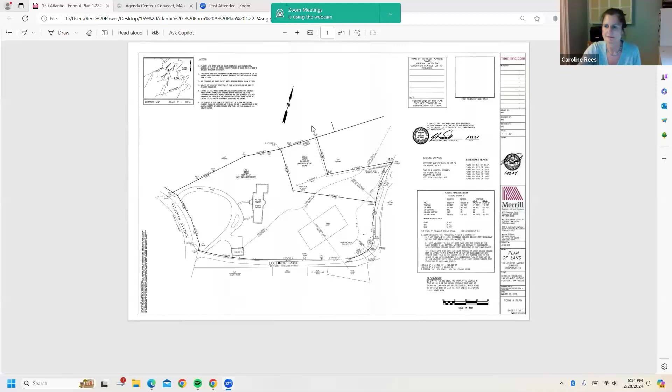Yeah, we can see, Brendan, you're breaking up more than Caroline is, so maybe Caroline should present this. It's not changed from what we saw the last time, correct? Okay, well I guess maybe, no it is not. Okay, oh good, he's there. Am I stable now, or is it still choppy? Yeah, that's all right, go ahead.

Okay, so the plan hasn't changed from before. I guess Mr. Higginson did have a conversation with you, Tom, I believe, stating that section of the zoning does still apply because it doesn't affect the Form A as far as the zoning change from last November. It's the zoning, just so everybody knows, the day after I got Caroline's opinion, which I think everybody has seen, which Caroline, I'll summarize it, correct me if I'm wrong, but...

A&Rs do not fall within the ambit of an amendment to the bylaw, as other permits would, like a special permit or a subdivision, and things of that nature. So the old rule with note 4, which has now been eliminated in the new bylaw, will still apply to this. Charlie happened to be visiting Merrill upstairs on the day after I got the letter, and I informed him of the opinion. He came down to say hello, and so I informed him of the opinion that day. So to me now, this is fairly straightforward. I don't know, Caroline, if there's anything you want to add.

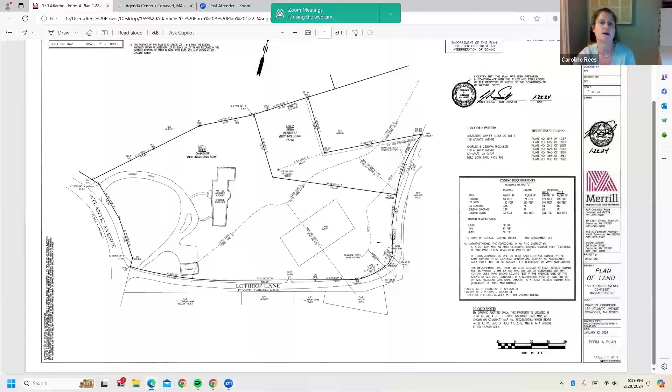That's not my understanding. I believe the intent is the provision in attachment 2.4, number 4, when you have 2 lots owned by one property owner. Was the intent for it to be a buildable lot? That's the whole purpose of this. Yes, it falls under that, as Caroline said, and we put a notation in the bottom of the zoning box with the exact verbiage of that section.

Note 4B specifically: where a lot is greater than 120,000 square feet, you can carve off 20,000 square foot lots as long as the average of those lots is greater than 60. The existing lot has 125,000 square feet, so we're carving off a 25,000 square foot lot and a 100,000 square foot lot, so the average is greater than 60. All right.

What you could do, Mr. Chair, if it gives the board some comfort—I'm just checking if it was already included on the plan. I can't see it on this view. Caroline, if you could zoom in the bottom of that zoning table, the verbiage is right there.

I wasn't suggesting that. I was suggesting what the board could do is include in their signature block that the endorsement is not to be construed as any sort of compliance with zoning, and just leave it at that. It'll ultimately be up to the building commissioner to determine at the time of building.

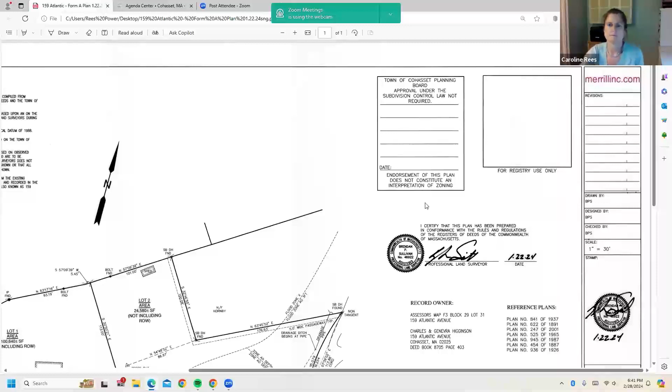This could be the last under 60,000 square foot lot developed in Cohasset in RC.

All right, anybody else on the board have any questions? Well, typically we make some kind of assessment about access and frontage. What do we have? Does the lot have frontage? It does.

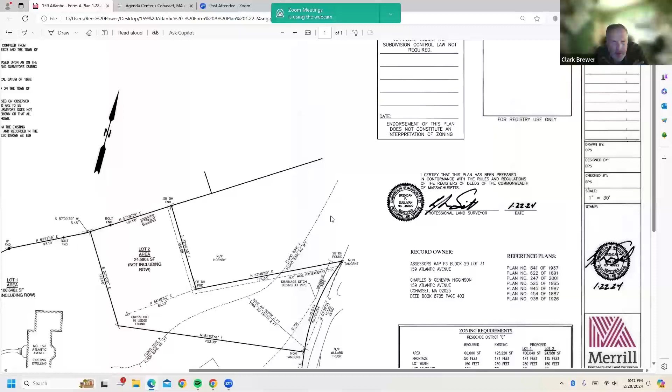It meets the frontage, lot width, and area requirements. I can read it to you—I can see it. I'm just asking the question because that's what we're supposed to do. And I can see that there's frontage on Lothrop Lane, a private way. Correct.

Lothrop isn't very wide, but I believe there are houses further into Lothrop beyond this point. Doesn't it make a big loop? Yeah, it does narrow. It loops at the end technically—I thought it dead ends. Mathematically, it does connect to Hobart, but there are a few houses beyond it, at least three, maybe four, beyond this lot, so you have access and frontage from a private way in existence prior to zoning.

Yes. And I think the only other thing the planning board would consider, and maybe counsel can confirm this, is whether it's of adequate width and construction—adequate width, suitable construction grades, et cetera, for vehicles to pass over.

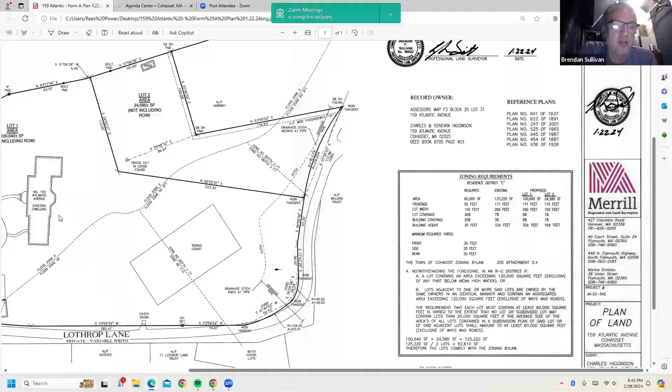This particular diagram doesn't have any topographic features. What is the topography there? Are there issues that are discussable because there is some reason to do so, or is it simply a flat and indifferent piece of roadway? It's a fairly flat lot.

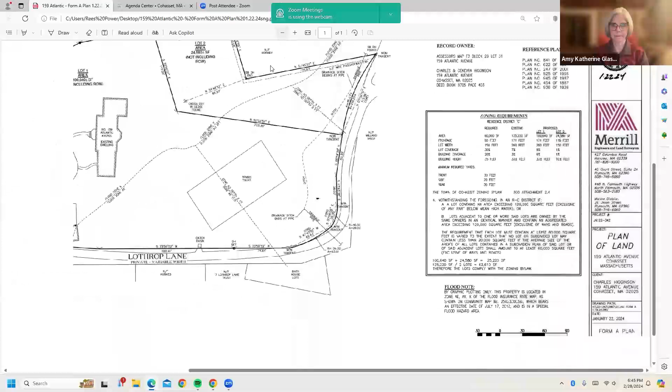We are showing the flood zones. It is accessible. There already is a gravel drive off of Lothrop Lane that runs approximately along the 5-foot wide passageway in the northern portion of the lot.

But the access isn't illusory. It's not a big piece of ledge between the access and the usable part of the lot, and it's not a big wetland. It's not illusory access. Correct, there is some wetlands there, but we can get access into there.

Doesn't seem that there's necessary additional discussion then. No, it's pretty much access, frontage. Whether it meets zoning or not is not really our thing. The issues of it being in the floodplain and what can get built there would be a different inquiry for a different time.

All right, so let's move along. Do I have a motion to endorse? And if there's any conditions, state what conditions you would add. Motion to endorse as presented. Second. Okay, any further discussion?

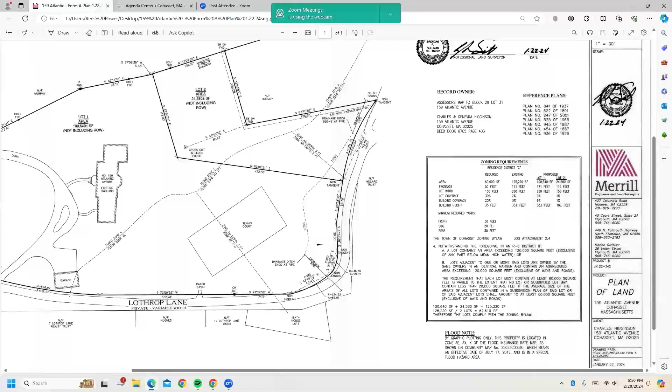I actually have an easement through the property. Do you see that easement there? That's my easement. And I actually am trying to figure out, they're trying to carve out that L shape there to build on. You all say that there is no water on that property or very little. I actually have video footage of a lake in that property.

Right, Ms. Murphy, I'm going to cut you off there just because the approval-not-required process is a form of dividing two lots under Massachusetts law. It's very, very limited. It only says, can you divide a lot? Can you create two lots that have adequate frontage and adequate access to it? Those are the only two inquiries. And again, we talked earlier about the endorsement — we're not saying anything else in this process about its compliance with zoning and its buildability.

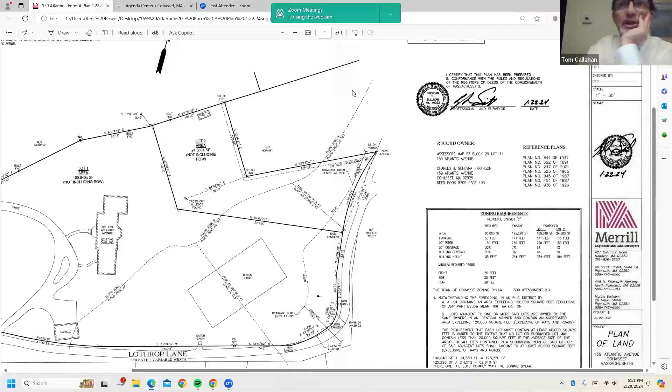Okay, understood. The owners have expressed that they intend to try to build, but we've heard the word floodplain. Now you're saying actual water. Yes, this will still get subdivided subject to any easement rights that exist. Okay, and they're going to have to go through the process of getting a building permit. If they're in a floodplain, they're probably going to get a conservation and a zoning permit.

Okay, there's going to be a lot of things that go on, and that's where you would bring up these concerns, with all due respect. I don't mean to cut you off. No, sir, I really appreciate your saying that.

I didn't quite understand that. Like I said, I had tuned in for another meeting and then this is what I saw. And given that I'm a direct abutter and never heard anything, I was quite surprised. Yeah, but the ANR process is this quirky little thing in Massachusetts law, and it's not considered a public hearing, so it doesn't require actual notice. The one for Hobart Lane that we're going to deal with is a public hearing, and we will read a public notice that was sent out.

That's a different process than what this is. I thought that our neighborhood required a 60,000 square foot minimum to subdivide. Well, there is a quirk in our bylaw for Residence C that allows them to do this, as long as the average of the resulting lots is 60,000 square feet, and the average of these two lots is still over 60,000 square feet.

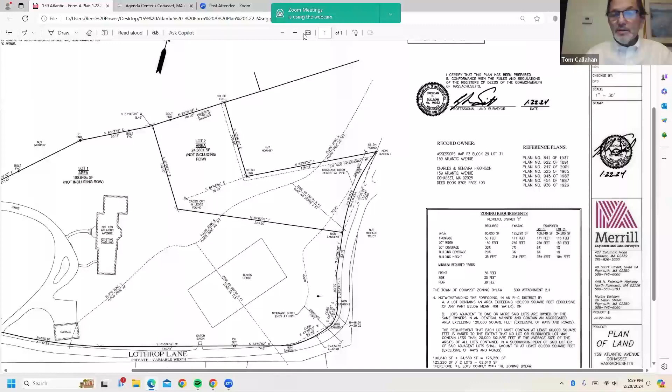All right, next we have 31 South Main Street. I believe this is a continuation of a special permit and site plan review under the village bylaw. Well, whoever's here for that.

Good evening, this is Gregory Morse. Hey Greg, how are you? Are you going to be taking the lead here? Yes. All right, why don't you bring us up to speed on where we were from last time?

Sure. This is a continued hearing at 31 South Main Street. I'm representing the property owner, EMF Rice Realty Trust. Erica Rice is on the call with us tonight. Also with us is the architectural designer, Paul Ford, for the property. This is an existing building that we were proposing to construct an addition off the back of it.

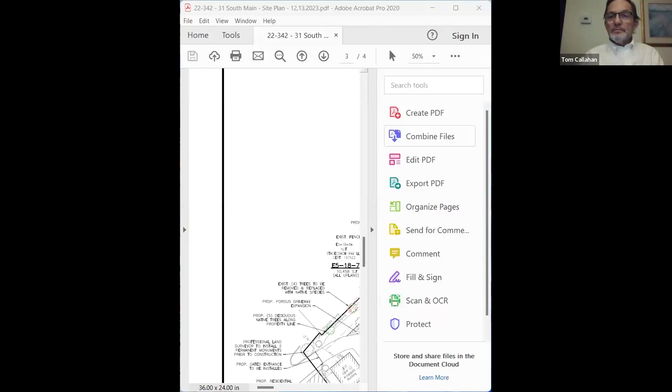You see the plan right there? Yeah. Yes. So this black bold line is the perimeter of the property. The property is in our village business district in the downtown area. The existing building is right here, number 27. This has one existing residential unit in it, and it has storefront along the front of it on South Main Street.

What we've shaded here in gray is the proposed addition. That is an addition of one residential unit. And included within that addition is a 2-space parking garage. Those 2 spaces would service that unit in the back of the building. The front of the building, there's that one unit on the inside already serviced by 2 parking spaces adjacent to the building. We weren't changing those parking spaces.

Out back, we were adding a very small area of new driveway just to access from the garage to the existing pavement on the site.

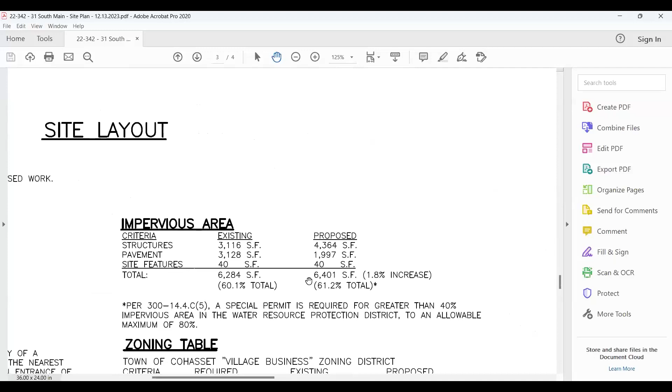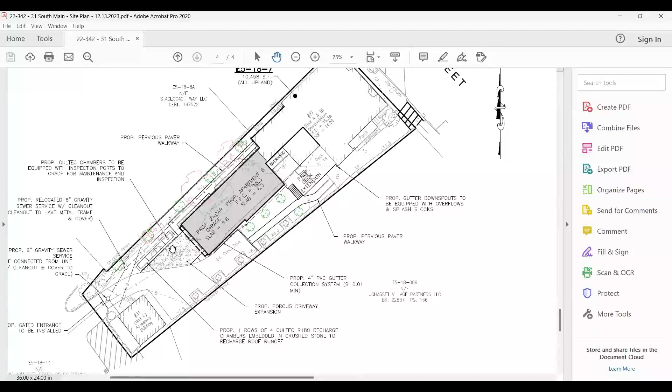We proposed to mitigate that increase in runoff by adding dry wells to the back of the building—4 dry wells connected to the roof gutter system to promote infiltration of that additional surface runoff. We also proposed a porous driveway, which is asphalt that allows water to run through it, with crushed stone underneath to promote infiltration.

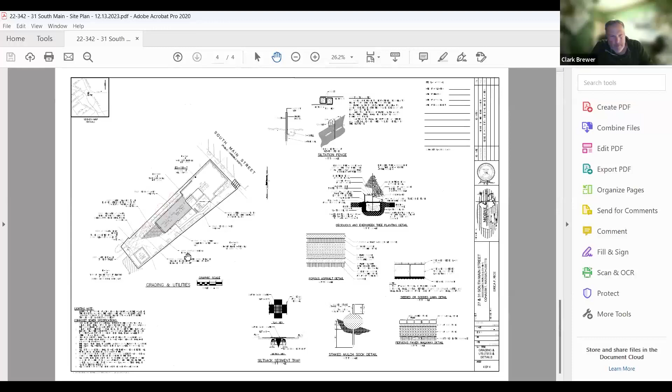All right, and where's the square footage of the unit? So I can have Paul put up the architectural plans. Paul, are you on the line? Yes, I just got it. Yes, so we got the unit size to exactly 1,500 square feet. So we are within the bylaws now.

Requirements. Sorry, I was coughing. What was the number? 1,500 on the dot. I hate when things come right to the dot, because some intrepid building inspector in the future might say, oh my God, it's 1,500 square feet. Make it—we'll put up probably some kind of a shaft somewhere that'll reduce that when we get to it. And this residential gross floor area definition changed, but you...

You're protected by that, since you applied for this special permit. Yeah, I'd add our floor area ratio on this site is well under the requirement as well. You're allowed up to a 1.3 floor area ratio. Our proposal is coming in at 0.52, so it's less than half of the maximum allowed floor area on the site.

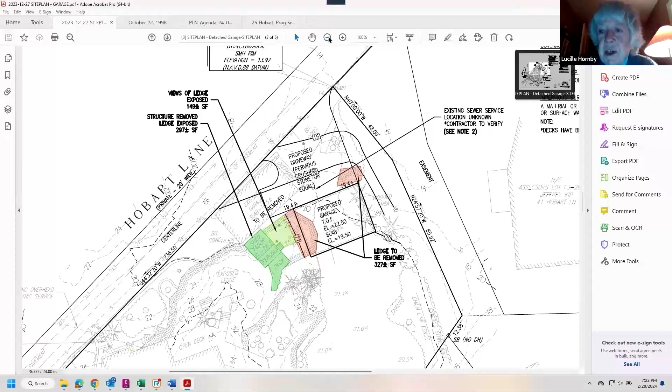Tom, if the abutter is reluctant to speak— she's there, okay. Yeah, I could speak. My property is to the east, I think you would say. It's 36 Hobart Lane, we're an abutter.

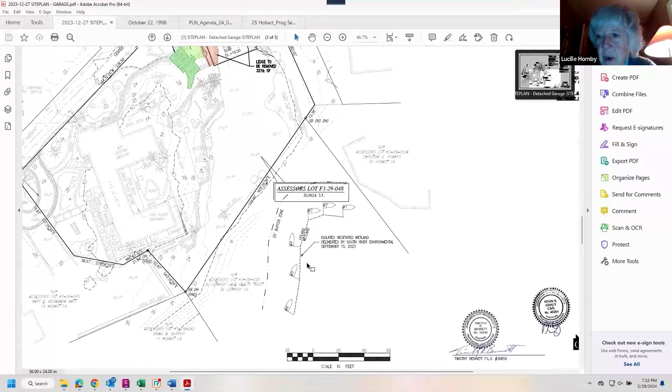And the property under discussion is way higher than my property. We have had a lot of problems with water going from different properties on Hobart Lane down onto my property and my neighbor's properties. I'm concerned the new garage is going to be built, as far as I can see, on what's now lawn, and I don't know what's under the lawn and how much water is absorbed by that lawn. Is there any provision that could be made that when the old garage is removed, there could be some water—I don't know what you'd call it—retention area? The water flows down Hobart Lane and then into my property, and it also goes directly from this property into my property. It seems like there will be less absorbent space after this happens, and I wondered if there could be any provision for using the space where the old garage was for water retention.

What is the plan for that area? There is going to be a pervious driveway where there's currently a paved driveway, but that will be one small cell. Obviously the presence of ledge leads to natural runoff that just is. But what is the plan for where the existing garage is? This area will all be landscaped. That's what we're proposing to do with the existing garage.

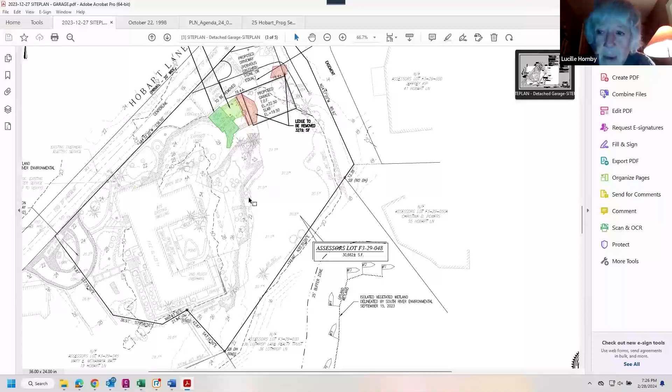Well, for the landscaping where the existing garage is, we could make it a rain garden, Paul, and that does retain water more. We could drop a little shallow point and do a rain garden and route a roof leader over there. Those are actually quite beautiful because they will have flowering plants. It looks completely natural, but it does hold water, and we can direct water in that location, as far away as possible from your property and still on this property.

Well, the problem with my property is that the water goes down Hobart Lane off this. I get water from this property two ways. One is when it goes down Hobart Lane and makes the right turn, then follows Hobart Lane and comes onto my property. So at least any water that's coming down Hobart Lane before where the current garage footprint is, some of that will be captured in a rain garden.

Well, that would be good. But we also have the issue that part of this lawn is now covered with garage. Could there be compensating something there? You are putting essentially now a building as a dam across that little neck of lawn. But the lawn would absorb water, right? Oh, yeah, it'll absorb water, but the question is the roof runoff.

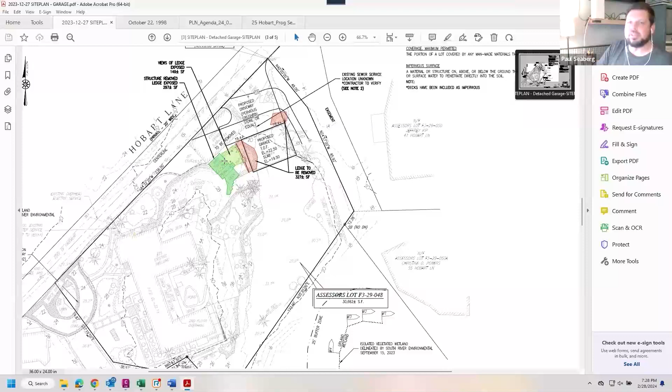Do you have any issues with that, Paul? Would that be feasible? No, that's perfectly fine. But I'd just like to also reiterate that by reducing the impervious coverage on the site, we are actually reducing the runoff that's going to be flowing off the site in post-development conditions from pre-existing conditions. From an engineering standpoint, we may be engaging in overkill, but it's not a problem.

Yeah, that's perfectly fine. Let me ask, are you getting a stormwater permit here? It's not required for this, just as Pat Brennan mentioned in his peer review. Okay, yeah, that's right, he did. But we're gonna kind of take up some of those issues, I guess, expand ourselves a little bit.

And also, where we're removing the existing driveway, that area now being pervious will absorb water, right basically off of Hobart Lane. And it's a similar area as the proposed garage in the grass area, which will be converted to grass area. A dry well on the other side of the garage wouldn't hurt. Sure, yeah.

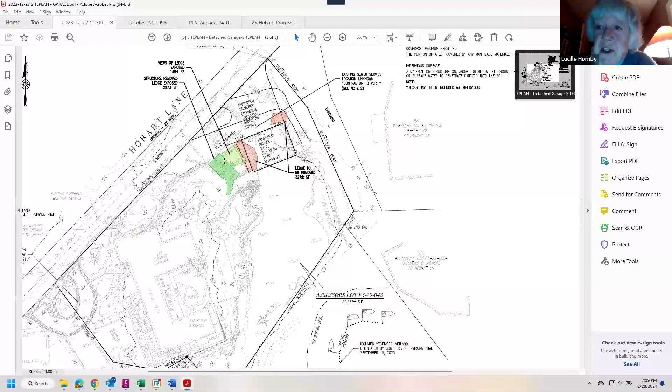Anything else, Ms. Hornby? Not really, because Jeff reassured me that there's not going to be major blasting. I was concerned that if there was major blasting, it would affect my house. The applicant said no blasting, just chipping. Yeah, he said no blasting, we can make that a condition, they represented they can do this with hammer jacks, so we can condition that that's how it gets done. Well, thank you very much for hearing me.

Okay, thank you. Anyone else in the public wish to be heard? Okay. All right, so I'm taking notes here that...

We're looking at removal of ledge and replication of ledge or uncovering of ledge as proposed but modified by Pat Brennan's comment number 1. We're gonna have a pervious driveway, we're gonna have dark sky lighting on the garage, we're gonna have a rain garden at the site of the old garage. The roof runoff on the new garage would be directed both to the rain garden and to a dry well on the other side, and there'd be no blasting, just chipping to remove what ledge has to be removed.

Anything else that anybody is concerned about or would see the need for a condition?

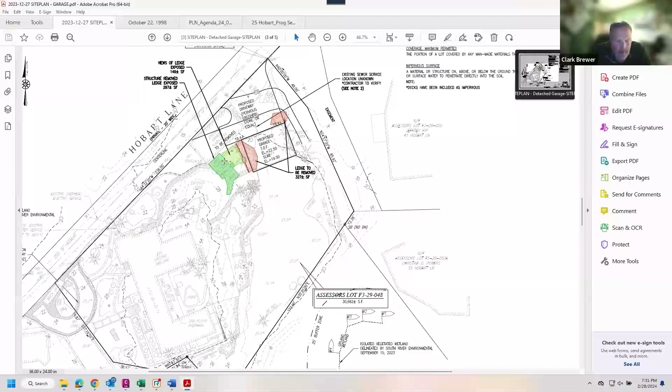I'll make a motion that references what you just outlined: to grant the special permit, making the finding that this is not substantially more detrimental to the neighborhood, with the conditions I've outlined.

All in favor? Any second to that motion? Second. The motion also includes closing the public hearing. Seconded by Kevin, thank you. Any further discussion?

Hearing none, roll call vote, all in favor? Clark Brewer, aye. Tom Callahan, aye. Amy Glassmar, aye. Kevin Heine, aye. Deirdre Hobson, aye.

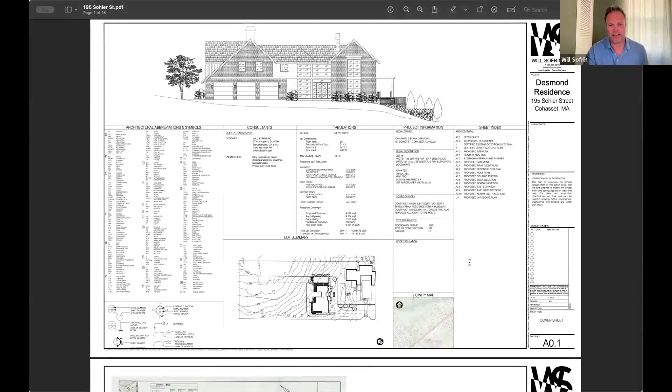I've got right here a cover sheet. So John and Sarah Desmond bought their property at 195 Sohier Street in 2017 with one son, and now they've got three sons, and they're outgrowing their home. Sarah's parents would like to move in with them, so the concept came up to divide the lot into two lots, Lot A and Lot B. The goal is to build a new residence on Lot B for John and Sarah to move into, so that Sarah's parents can move into the current residence on Lot A.

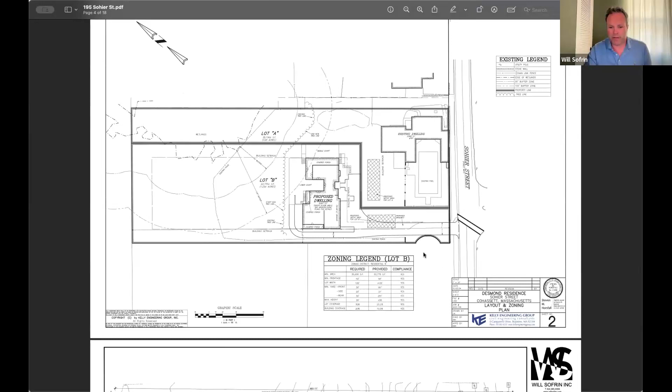I'm going to go right to, got a site survey here from Kelly Engineering. I think the board members will remember that we approved the ANR for this maybe a year ago. And then what we have right here is just certification that this project does comply with all required zoning requirements for the application. Could you zoom in on that for a moment? Yeah, absolutely.

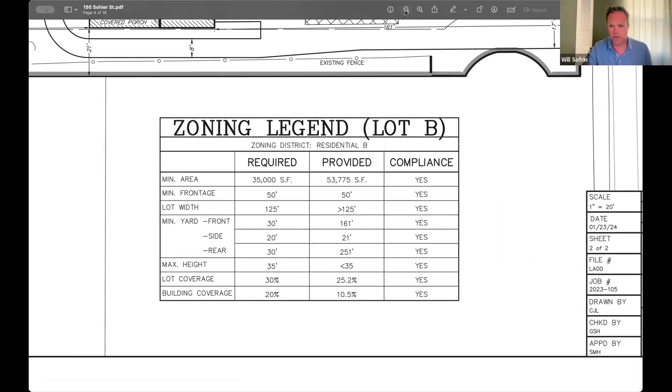Is everyone seeing this? Yeah, okay, all right. I'd like to see your height calculation and how you did it too. I don't know if the height, we have the, I'll show you on the elevation where we have the average grade plane and how we base the height.

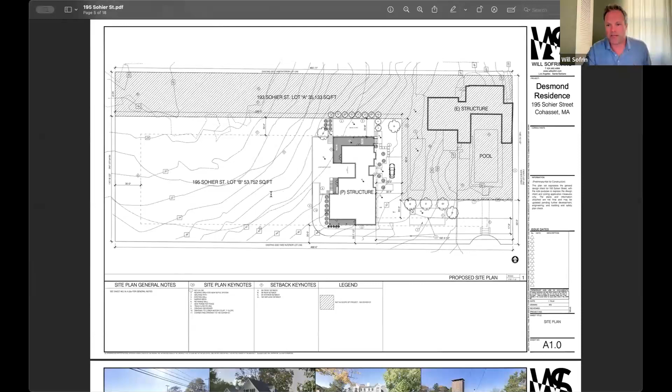What I've got here is a site plan showing the intention. The current house where they live, I guess, was the former town swimming pool and the town pool house. So the idea with this project is to keep the two properties in sync and make this pool area the central outdoor space for the kids and the grandparents. It also creates an opportunity for us to preserve and not disturb any of the beautiful wetland back here, the natural topography, the existing natural landscape.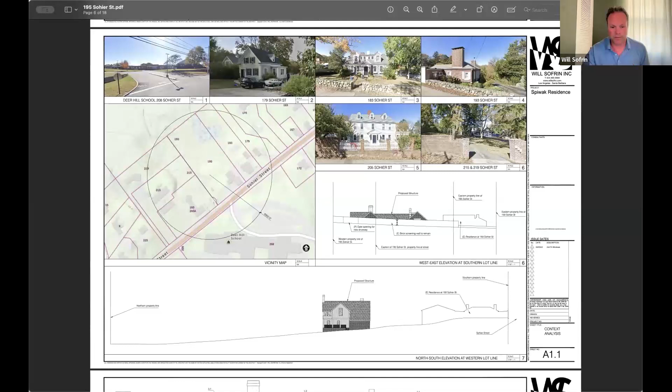This is a profile cross-section of the lot showing the proposed structure in relation to the existing residence that the Desmonds are occupying. The existing structure that they're occupying is a brick structure, and they love that.

So the idea was to design a timeless home that was not contemporary, but something that will age well in the town of Cohasset. I've got here a couple images of some of their traditional inspiration that they really like. They love the brick that exists on the current dwelling, so having white brick was a primary, important material for the Desmonds to incorporate. Also, these steep pitched roofs, something very traditional in New England, was a love of Sarah Desmond, so we've worked to incorporate that into the structure.

We're just proposing asphalt shingles for this sloped roof. We've got a metal lap material for the flat roof eaves right here. And for the foundation, we'd like to do a stone clad look to add that bit of a traditional element that you might have seen 100 years ago with the foundation.

Unfortunately, we discovered during the design process that the water table is so high that it forced us to elevate the structure much higher than we actually wanted it to be. And because of the topography, it required us creating this basement. But Mr. Desmond does like to collect his cars, so we took lemons and turned them into lemonade and have created a garage space due to the necessity of the height of the water table and the restrictions to the lot. So that's the basement level.

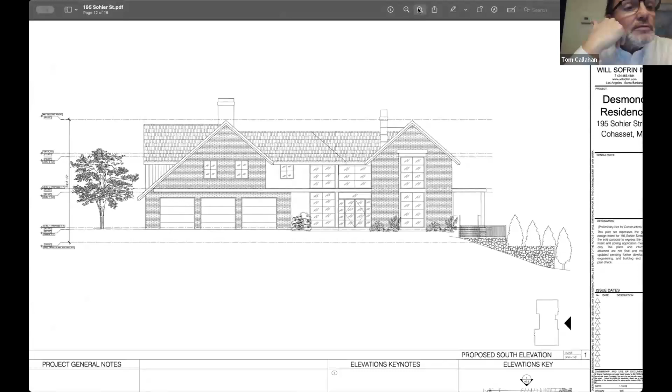Could you zoom in on it so I could see what these little notes are on this? Okay, and where is there a measurement? This is the baseline for the measurement. If you want, I can go back to their site plan where they established it. So the base grade is at 48.30.

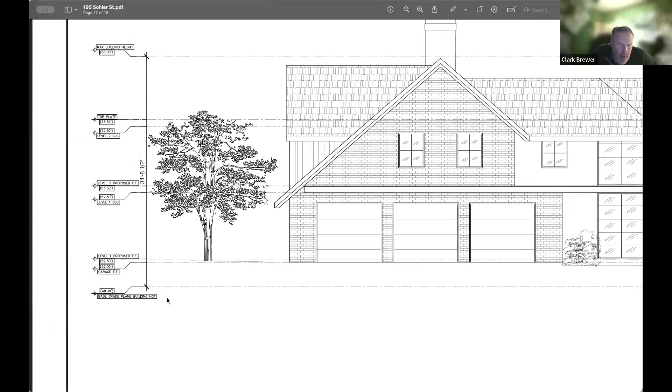While we're talking about it, why don't you just go to the site plan and show us where the points were taken, so we can put this to bed. Let's see. Now, I'm not sure, it doesn't look like they've called out where the points were taken. This is the Kelly site plan.

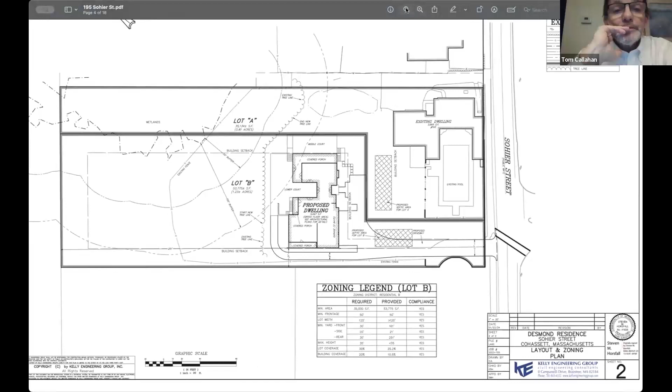Can you go down to the screen that had the picture of the white brick and everything? Because on the top of it was some other measurements of this building. Yeah, that one, can you zoom in on that in the top part?

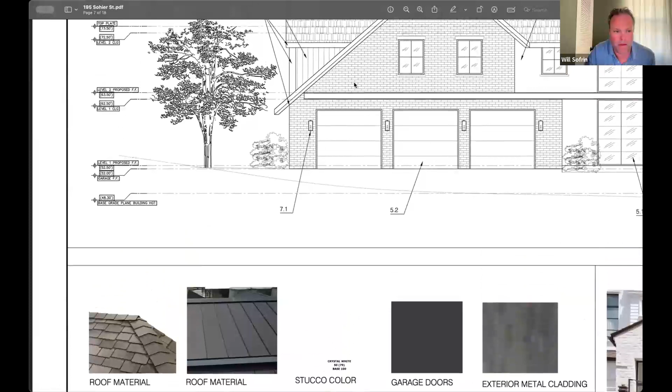You're going to see the same elevation marks here, sir. I'm trying to read what that small print is at the top. Base grade plane, building height. No, I'm at the top, at the ridge line of the roof. What does that say up there? Max building height.

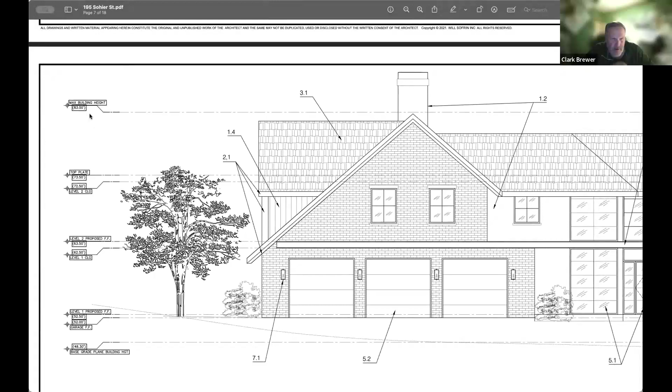Yeah, what does that say? What's the number underneath it? 83 feet. 83 feet, yeah, that's the elevation. Oh, that's not the elevation? Overall height. Yeah, okay. The maximum building height allowable is 35 feet.

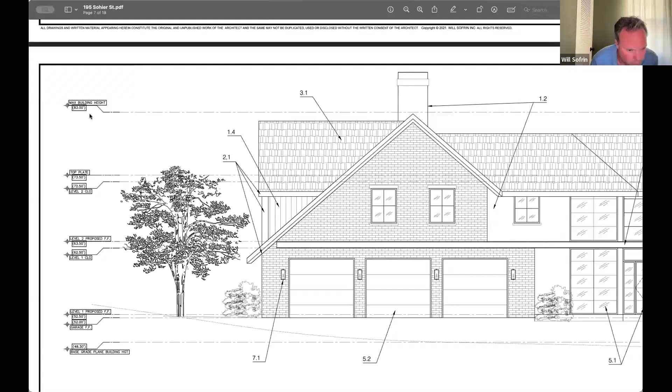All right, but doesn't it say 45 or 46 something at the bottom? It's 48.3 feet, sir. I can zoom in so it's right at the limit of 35 feet, is what you're telling us. It's slightly below - I think we finished out at 6 inches below.

Well, I think we do need to make sure, particularly if he looked at this in the fall, depending on whether he was aware of the bylaw that passed in the spring and whether it had been approved yet. I just want to make sure of the calculation, that they're coming to the right number here. I am noting that, particularly now since it's close for comfort here. I understand, sir.

And I presume that other permits are gonna be needed from Concom for stormwater. I haven't gotten that far at this point, sir. I really thought it would be important for us before we got too far down the track to have this presentation to achieve some initial feedback from the commission, to incorporate that feedback into our continued development of this project.

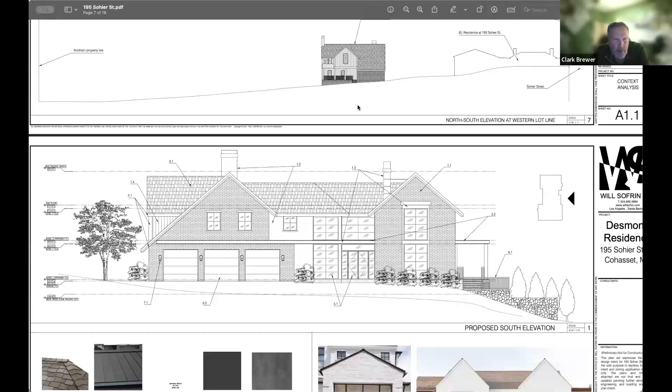Based on the site plan, your construction is within the 100-foot buffer from the flagged wetlands, and not very close to the 50-foot, which they consider a no-build area. So you probably have to go to the Concom for stormwater and in the 100-foot, but those are doable.

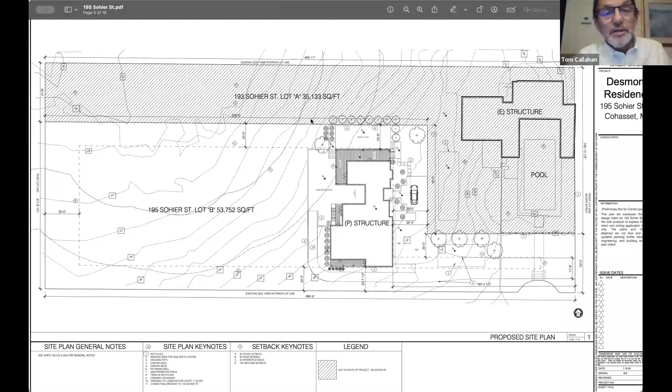The other thing under our large home review is the lighting plan and the landscape plan. Could you go over what you have for those? Do you guys want to see the rest of the elevations or should I just jump to that? Show us what you haven't shown us yet.

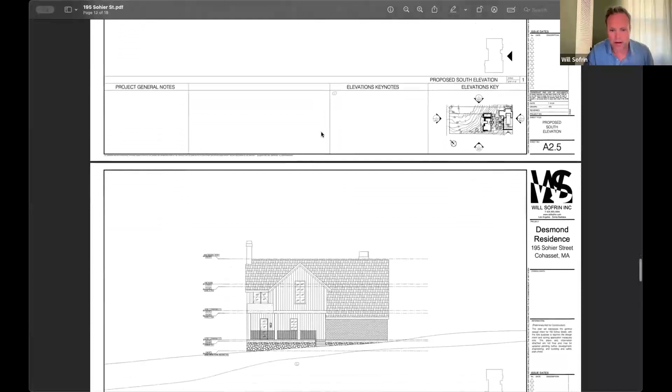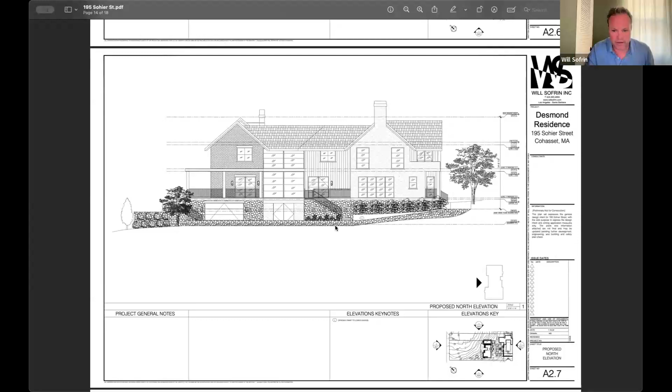So we've got the front elevation and proposed south, and this is the proposed west elevation. You can see here how the lot slopes down as we go from front to back. This line represents the topography on the eastern facade of the house. This is the rear facade, the north face. And so what we've got is a driveway that continues back, comes down right here and services the extra car storage that I mentioned.

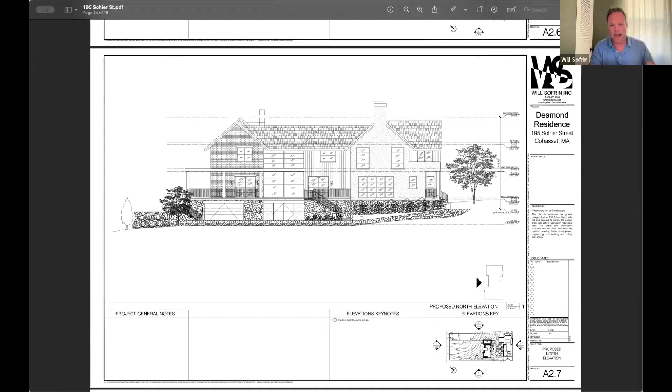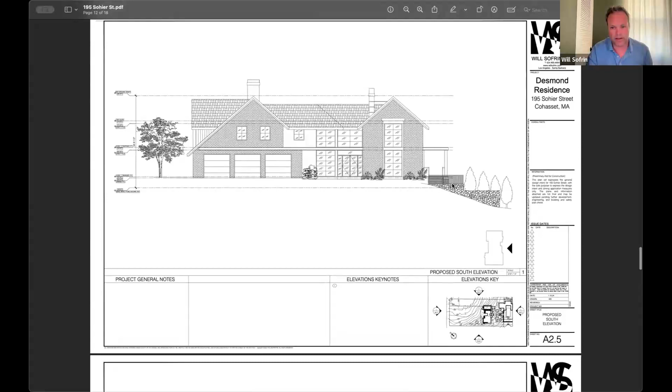The goal here was for us to really be careful and do as little cutting and grading as possible to mess with the topography that leads back down the hill to the wetlands. Here we've got the west elevation, and in order for us to mitigate the drop-off on the east, we created 2 courts on the side that step down with some stone-clad retaining walls. Going back as a reference to the front elevation, those are the 2 tiers I'm talking about. We would plant trees to conceal and not diminish the appearance of such a drop-off.

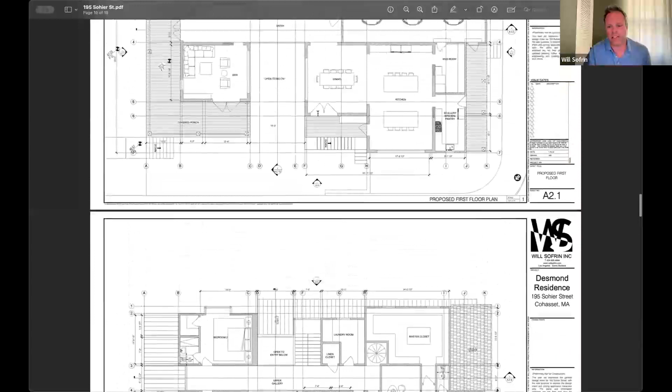I had a question about the stone, the brick wall on the front. You said you were gonna make an opening with some gates or something. I'm not sure if there's going to be a gate there or not, we don't know what the feeling is right there. It's a very safe, nice neighborhood and there are no gates. I just meant to say there's an opening there. Well, you're gonna have like a 400-foot long brick wall, so you're gonna have to bust an opening 10, 12, 14 feet wide, something like that, and then finish off the edges with some new material.

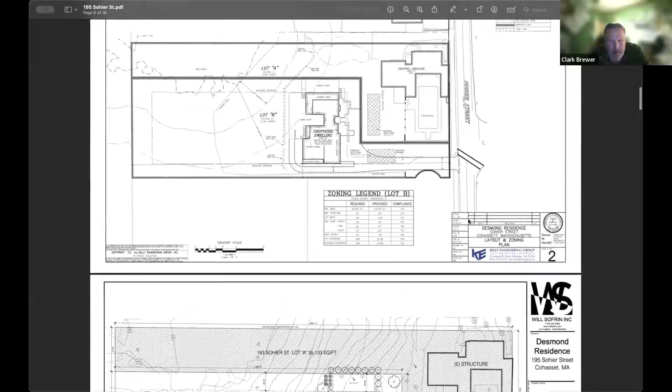Just to follow up, I'm not sure where that's gonna fall, where the crosswalk is for the school too. Does it show up on the plan? If you look at the driveway and the crosswalk, that's the existing crosswalk, right there. And then this is the driveway. Okay, so it's right there.

The other comment is when I looked at this initially, before your presentation, I was like, gee, the house is really jammed up towards the front. But now that I know it's a multi-generational compound essentially, that explains it. You want to have your separate space but be close as well. From a planning perspective that makes sense. And that's why you see there's no other swimming pool, the family wants to cohabitate together and enjoy the property.

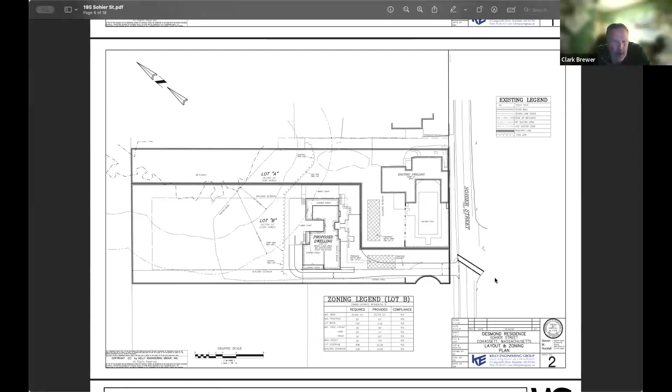And on the basement plan there was a note about a boat. Mr. Desmond is an active sailor and his boys are about to start entering the sailing world, so this is probably going to be where the kids' opties go and all their sailing gear, sails, and winter kind of stuff.

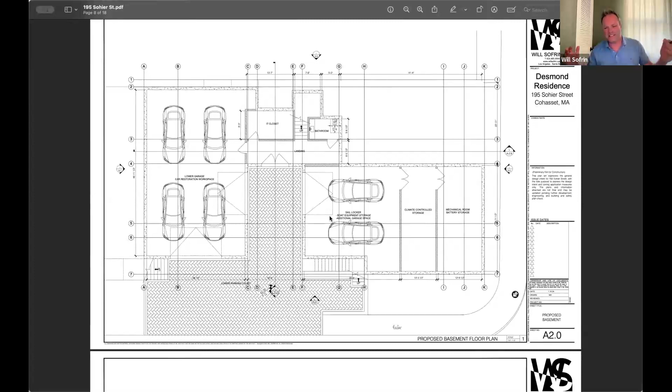Is that a Porsche 356 or a 911? I can't really tell, I think it's a Tesla Model S I use as a CAD block. That's good. But yeah, I'm a boat guy, so it's always good to have space to do your projects.

I do have one more comment. I noticed in your section, if you could pull it up, that you have offset footings, ones that are flush with your exterior wall. That would be more typical in kind of zero setback situations. I don't know if you intended to do that because of the setback, but you should be able to do standard spread footings, just check with the building inspector. Typically the setback is measured from the wall, not to the closest footing. Yeah, this is preliminary at this stage, it's just more of a start and a suggestion. I'm gonna defer to what our structural engineer devises, and then that'll be reflected in the architectural set.

Just so you know, the setback is typically to the building face or foundation, that's what they do for the as-built. So a footing would extend into the setback in this situation where you're conforming to the existing 20-foot side setback. Whatever you work out on that is fine, I just wanted to point it out. Thank you, I appreciate that.

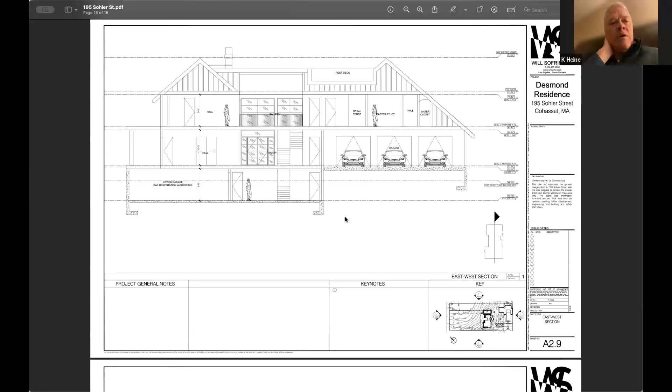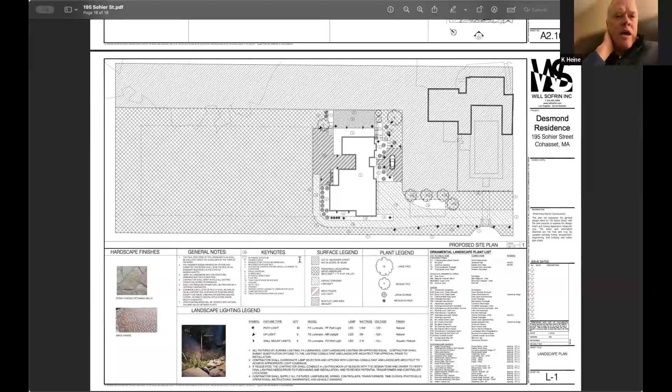All right, anybody else from the board? You spoke to the landscape lighting, and that it's landscape lighting that provides minimal glare, minimal output, to highlight features but not be obtrusive to passersby or abutters. Could you speak to the lighting? I think you did have some shown earlier in your plans on the exterior of the building. I didn't see any compliance noted with regard to dark skies or anti-glare in the features shown, and I don't think you had an opportunity to speak to them, but I did see them in one of your earlier sheets. Yeah, I did not have an opportunity to speak to that, and I appreciate you bringing that up. Honestly, this is really just a bit of a filler piece, like Urban Electric. I'm familiar with dark skies.

One of my solutions has always been to put a sleeve over the light bulb that helps limit the amount of light that comes off. But I'd like to say that this is more meant to show an intention and a plan here. I would like to continue working on finding the right light fixture for the house. I wouldn't say that this is it.

I am very conscious of dark skies, and that all goes back to the landscape lighting where you see that we've just got that fixture that's casting some down lighting, because the Desmonds appreciate seeing the stars, and they would certainly hate to lose some of that visibility they have.

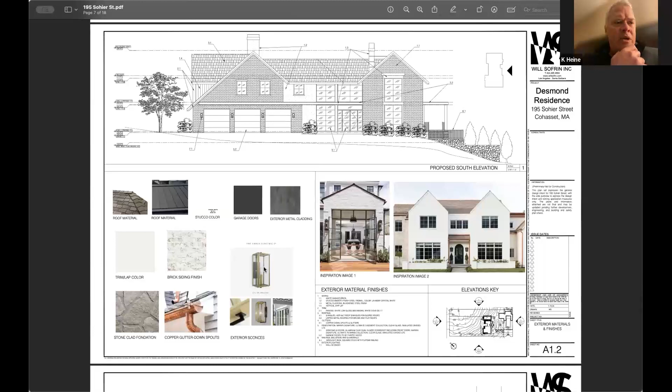So that was a filler, and that will be updated then. That is not representative of the direction you're headed. That's correct. I look at it more as an aesthetic direction, but I promise that we will absolutely be selecting fixtures that conform with dark sky requirements.

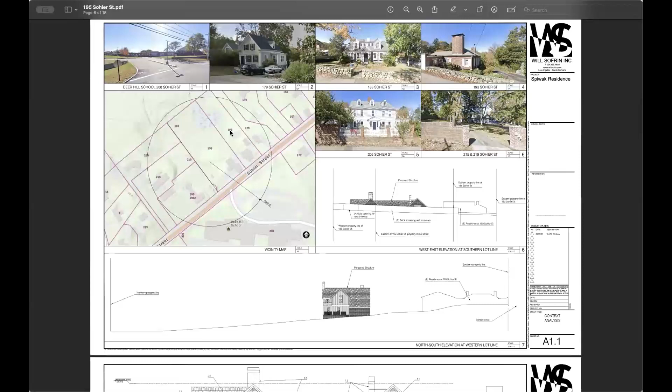I did want to ask specifically about the roof deck plan. What exactly is that overlooking? Our yards are very close. We have a pool in our yard. I don't know, oh, you can't see our yard here. You know where we are, and we like our privacy. I just was curious as to if this roof deck is going to be directly looking over ours. I hope I'm wrong. I can't tell exactly where it is, and I'm not the best at figuring this stuff out.

Can I help answer the question? Please do. Yeah, thanks. Okay, so I went to the site plan just to help show you. So your property is right here.

And I'm going to show you how that works to continue to create privacy between your two properties. So, okay, so it's over there. I'm embarrassed to say, but with the northerly, southerly, I'm thinking wait a second, looking from what direction? So, okay, if you're looking at the front of the house, your property is over here. The roof deck is right here. And actually it's sunk in.

Yeah, it's cut out into the roof. So a person's head would only be about right where the tip of that cursor is. And then this is that roof line that runs the whole eastern facade that's higher up, to create that continued protection of your privacy from their roof deck. Right. Okay, great.

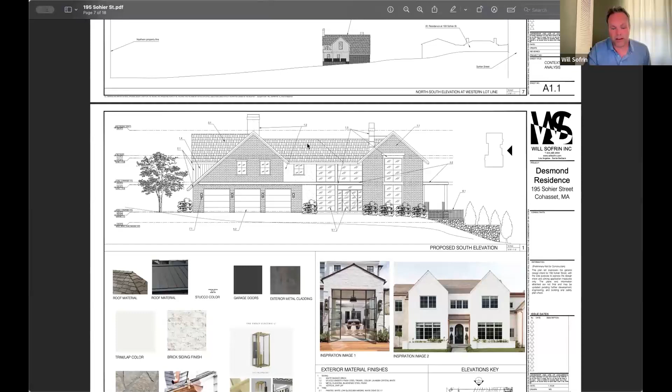And then, so the side that is abutting us, if you could show me, here you go.

Would you mind going back to a better perspective for me so I can see the existing home and get my bearings? Yeah, absolutely. Thanks so much.

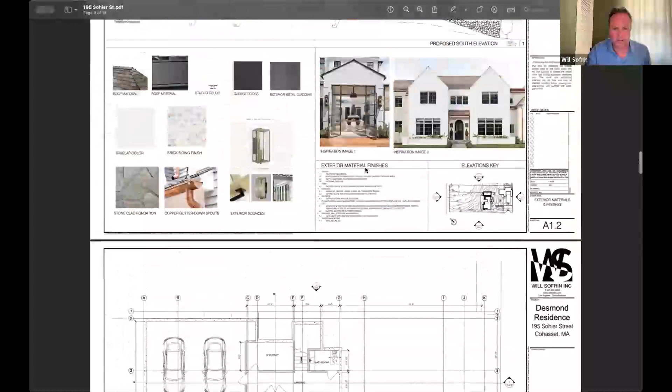No problem. Let me go to the site plan. So this is where you are. Would you like to see this side? I was just curious, and by the way, the design looks gorgeous. Love the modern-esque farmhouse look of it. It's fantastic.

Curious about that side. I guess that's going to be the drop-off wall you spoke of, and then what exactly is going to be the tie-in on that side over to the existing property? Is there a plan for that? There's no plan. I mean, there have been some discussions, but right now John and Sarah have asked me to focus just on this.

I know that the tie-in plan would be to develop a walkway so they can walk over here. This is going to be the intended backyard of the property, right here, and then over here we've got this terrace area. The idea, which I think will help with concerns of privacy, is I've got these trees planted along this retaining wall that creates the terrace yard, to reduce the towering but also create privacy between the two properties.

If I go back to my elevation here, you can see the suggestion of the mature trees. Okay, so okay, but the terrace, I'm sure I'm not seeing it properly or don't have the imagination for it, but I feel like that's okay.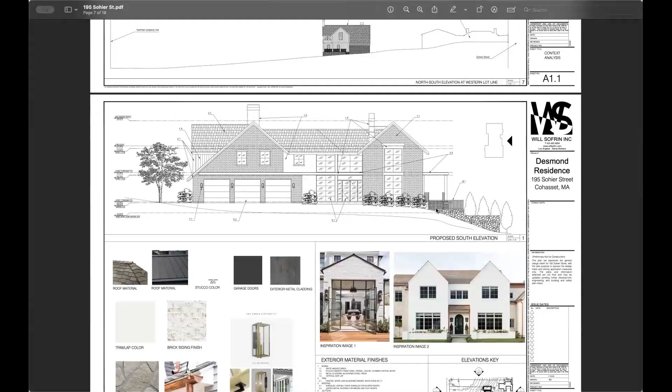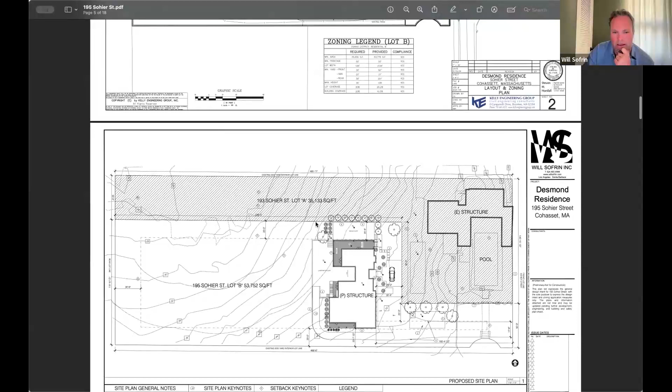Will those hedges be built anywhere near the easement? There won't be any easement, no conflict there. The easement between the two properties is only right here. So these hedges will be planted right here between lot A and lot B, a good distance away from the abutting neighbor.

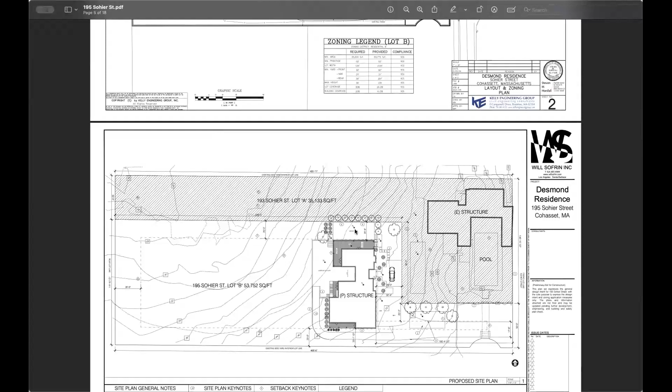Yeah, us. So okay, but this lower deck here that we're talking about—this one? Yeah—is there, so that elevation does kind of lift it up. We're right here, you know, can't see it.

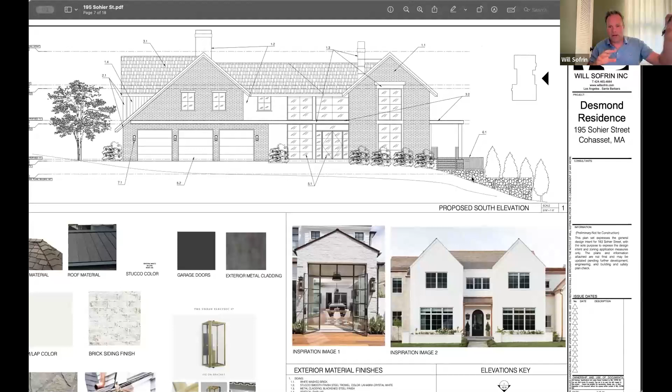Yeah, and the reason why is we're not happy about the structure needing to be as high as it is. We're really not happy about that. It was supposed to be substantially lower. It's due in part to the requirements we'll need for the new septic system for the existing structure. So that's where we're trying to ease the impact—instead of having a big drop-off with a hill, we came up with this idea of creating a flat yard here, but then terracing it down, with trees around it, so that when it's mature, you'll just see a nice line of trees that'll help maintain that separation and privacy.

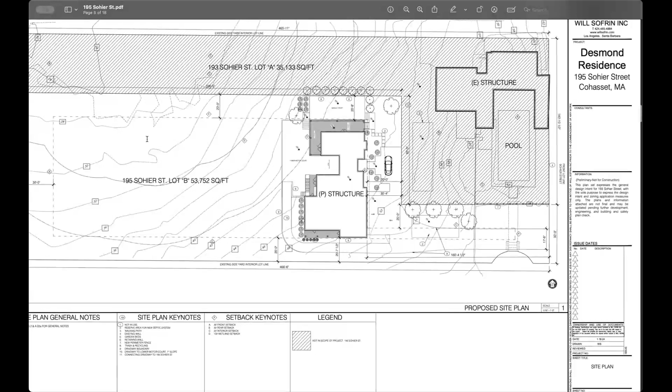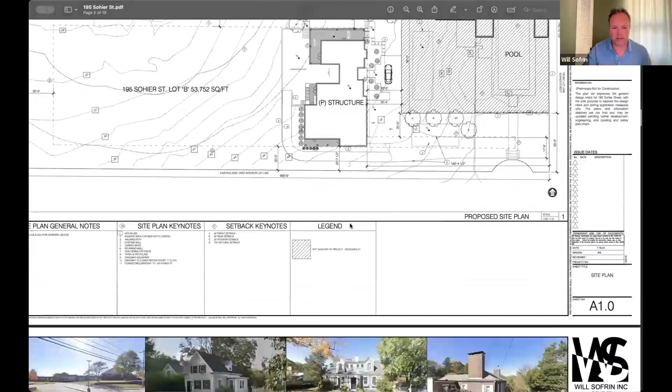I'm sorry, we have an area that we sit at a lot—there's a fireplace, a barn, a shed. I don't think so, again, because the idea is that right here we've got this large roof that acts like a big wall. What I'm going to do is go to that eastern elevation that will be facing your property, and you can see how the roof deck is on the other side down here. So this section of roof is going to act like a big blocker for you to maintain your privacy. Okay, yeah, no, that's appreciated.

That's great. And then the plantings that would go along this lower piece on the left-hand side as my screen sees it—would those plantings, the maturity level of them initially, be enough for privacy, or is that going to be 3 years down the road? I would say initially, absolutely. The plan is to bring in mature trees that are large, because I also think the feeling right here of this tier and the drop-off on their end is very uncomfortable.

So to have trees here, I think we'd be looking at 36 or 48-inch boxes, honestly, to start. We'd want to make sure this fills in quickly and feels as if it's been established for a substantial amount of time.

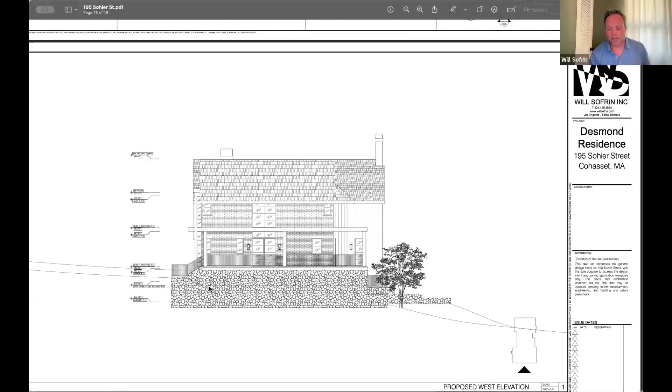Okay, but that's still not covering at that height. That's not going to cover anything if they're 3 to 4 foot trees — they're not going to have privacy either. Oh, when I said 3 to 4 foot trees, I'm talking about boxes. So you're going to have a very tall tree — it's just a definition of the box, the planting. Oh, okay, I thought you meant like when you buy a tree by the root size. No, sorry, it would be the box size, the root, but that's not representative of the height.

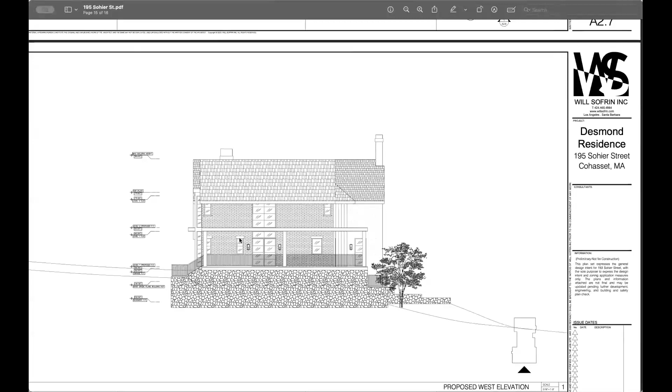Thank you. In the drawings, at some point when you guys get buttoned down, I wouldn't mind seeing a schematic with those there. This is the first time we've seen it. Yeah, it's the first time. So when that happens, we'll be looking at that.

Absolutely. And I feel bad — John and Sarah told me they've been trying to reach out to everyone. I've got letters from other neighbors, but I can wholeheartedly say they want to hear what you have to say. They want you to be included in this. They understand there's an impact to you, so I know they care about that, and we will absolutely include you in the continued development of the project.

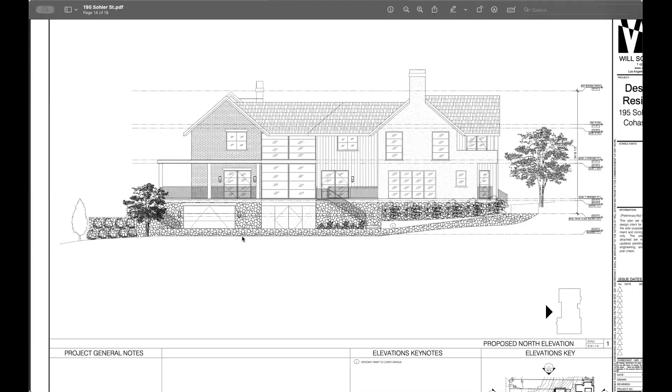Excuse me, Tom — something related to what was just discussed is that retaining wall or patio on the east side. Stone walls can only be 3 feet high, according to our zoning bylaw, when they're in the setback. You can build a 3 foot high retaining wall right on the property line. It seems like you may have to create another step to accomplish that.

I hear what you're saying. Yeah, I'll make a note of that. It's in a nuanced part of the zoning bylaw — I can't tell you which section, but it covers fences and stone walls.

We used to have it not be limited to 3 feet height, and then about 10 years ago, some guy on Cedar Lane built 8-foot high granite walls right on the property line. Everyone freaked out, so they changed the zoning to only 3 feet. Gotcha — that's only in the setback area. Once you're beyond, at 20 feet, the height obviously doesn't matter.

I made a note of that and we will incorporate that adjustment. Stepping it, there's no reason you couldn't build a 3-foot wall, set it back a couple of feet, build another 3-foot high wall, and then you're there. Yeah, and maybe that would actually be a nicer way to soften it with the hillside right there instead of what we have. Yeah, you could have some flowy planting off of that. Yeah, I like that.

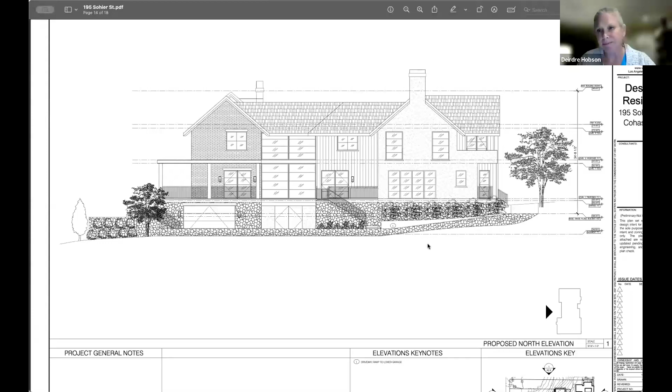Great, thank you very much. We'll see you then. Thank you, good night everyone. Good night.

All right, we have two other things on the agenda. I think we have two sets of minutes, March 6th and March 20th.

Did I have a motion to approve those minutes? Just for clarification, March 6th and March 20th are your next hearing dates. Oh, I'm sorry, that's what I'm looking at. There was only one night of minutes. I'm sorry, right, yes, it's from your last meeting on February 7th. Okay, all right, a motion to approve the minutes of February 7th.

So moved. Second. Okay, all in favor? Clark Brewer, aye. Tom Callahan, aye. Amy Glassmar, aye. Deirdre Hobson, aye. Kevin Heine, aye. Sorry, Kevin, no, Deirdre, sorry. Hobson, aye. We heard you both. Maybe we should just say aye at the same time.

Then we have on Heritage Estates off of Beechwood Street, there was a request for a lot release of that subdivision, and I think — is it the last lot? Yes, I believe so. Do you want me to pull up the request? Yeah, could you pull up the Greg Morse request? Yeah, because I believe there's still an issue that not everything is done.